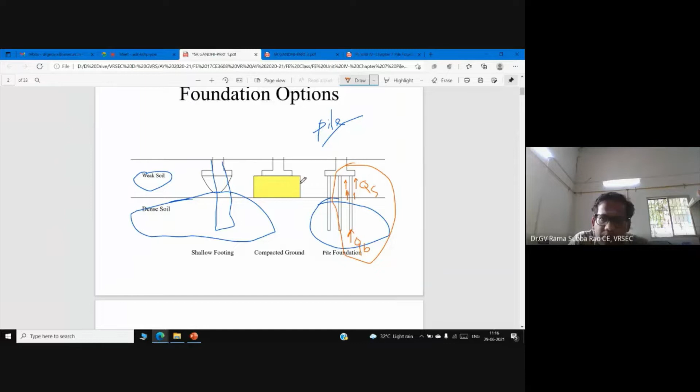I'm speaking about a single pile. Gradually, we'll discuss groups of piles. If you are going for ground improvement, you can still go for shallow foundation. But if you are not ready to go for ground improvement, then the first option is pile foundation.

So the beauty of pile is, it's not only having end bearing. In the case of shallow foundations, they have end bearing. Whatever equation you are trying to use, it is end bearing - what we calculated, c Nc, q Nq, 0.5 gamma B N gamma - in fact, it is end bearing. Whatever you are trying to show, it is end bearing.

But here, in addition to end bearing, it has skin friction also along the length of the pile. It has a tremendous skin friction. That is what we would like to tell you.

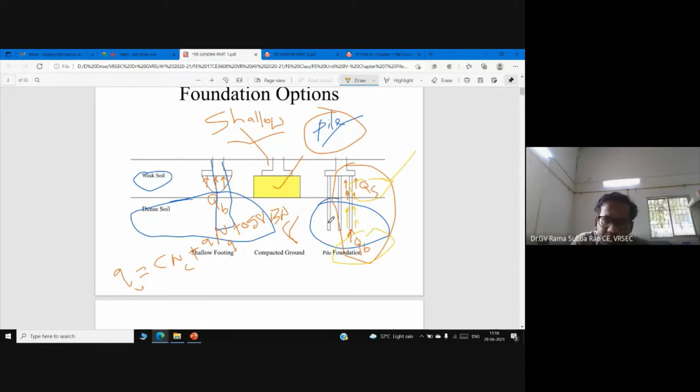So now you see, this is the advantage of pile foundation. Pile can transfer the load to deeper layers.

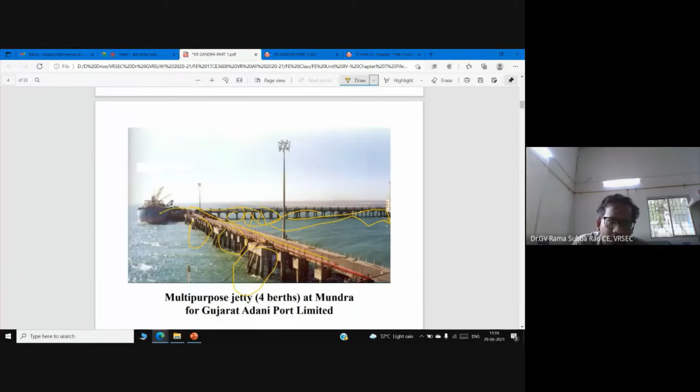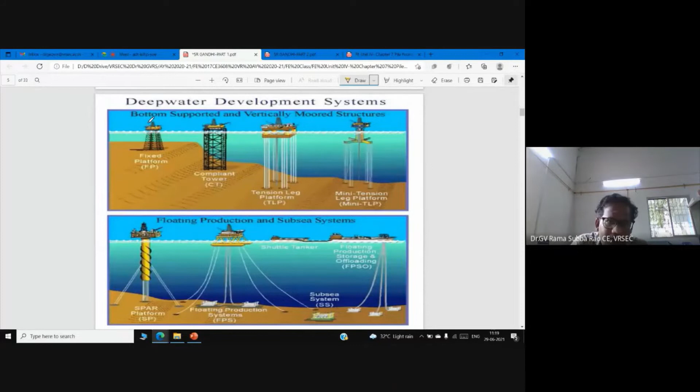So this is a wonderful picture. It shows a series of piles supporting this jetty, in order to facilitate cargo transport - this is what's happening in the port. These are typical offshore structures. Oil exploration is happening here. You might have observed this in the news - this is a fixed platform for oil exploration, many times used by ONGC, Oil and Natural Gas Corporation.

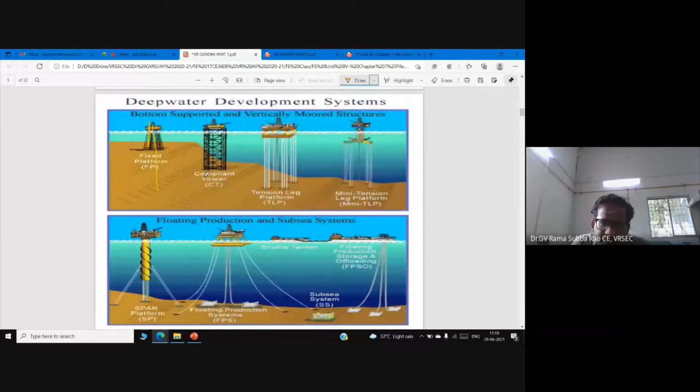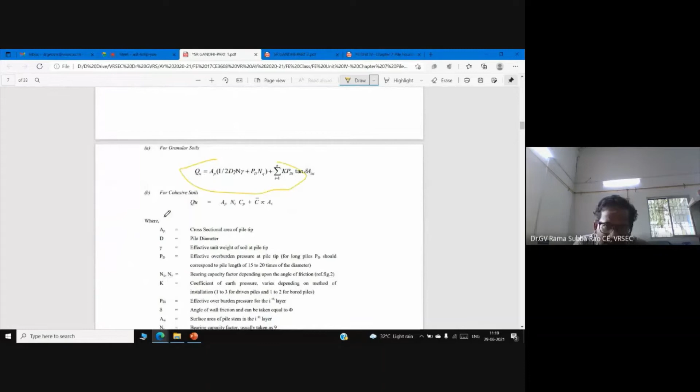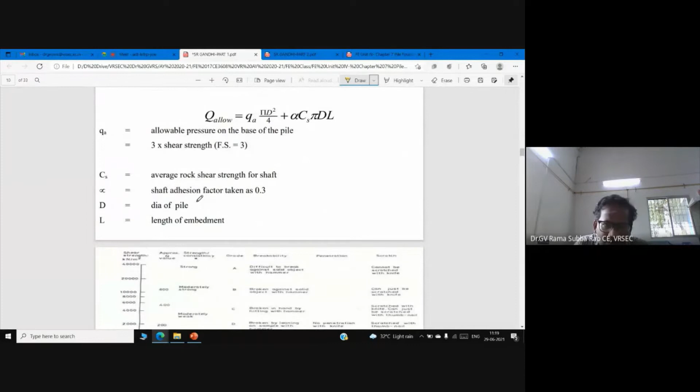So this is the code of practice we are using, IS 2911. Anyhow, we will discuss these formulas - don't worry, this is what we used to discuss in classrooms. We are very good at dealing with theoretical aspects, but now our interest is to understand the practical aspect before starting the theoretical aspect.

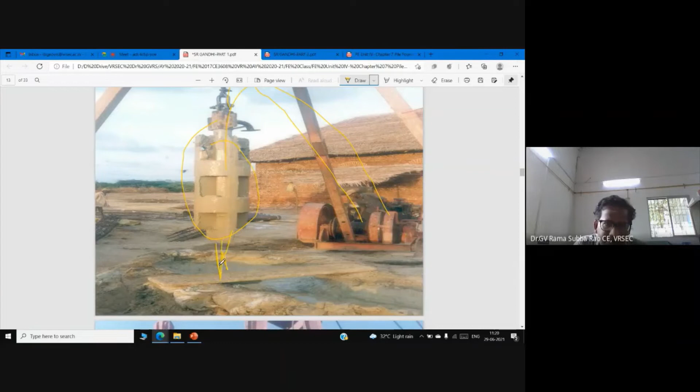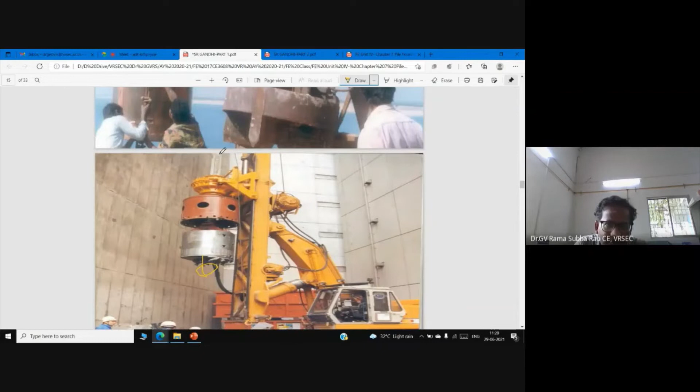Now you see this chisel, used for making boreholes, operated with a winch. This steel rope is connected to the winch. Now you can see this chisel in action - this is the hydraulic rig actually. One can guess the length of the pile we are expecting from the length of this drilling rod.

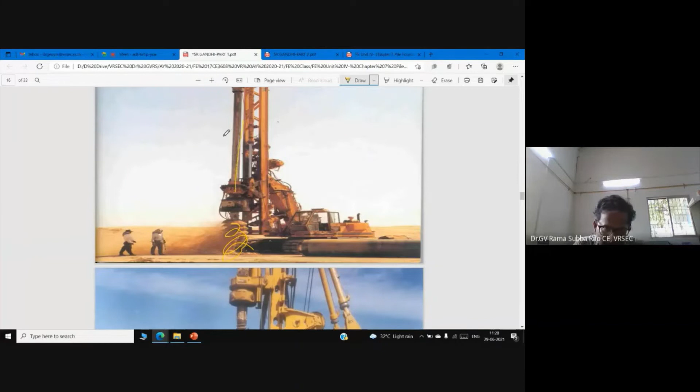Now you might notice this equipment nowadays even in urban areas. You can see this helical auger - the rig has a rotary action so we can make the borehole. You can see these people are very busy making boreholes.

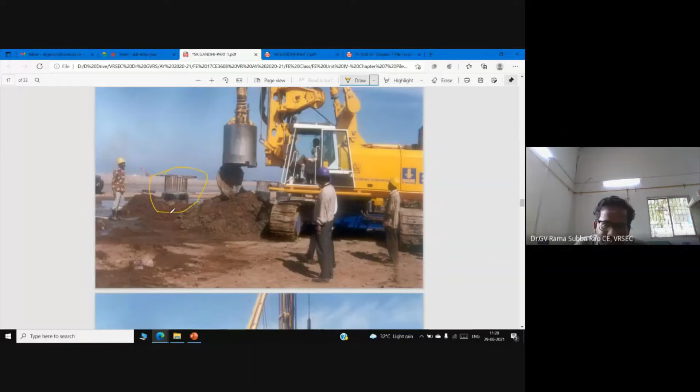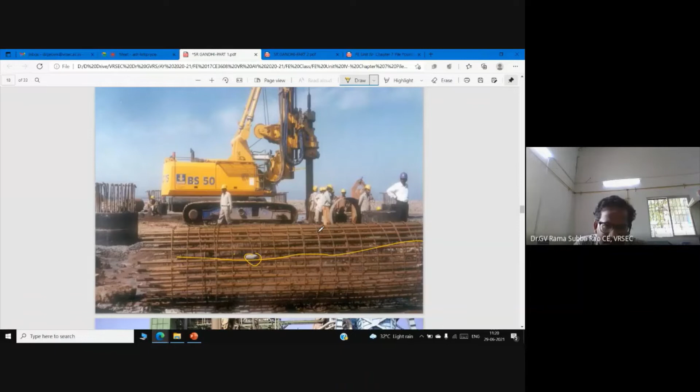This is the constructed pile. This is the reinforcement actually. These are the cover blocks - usually for large diameter piles, we use 75 mm, 3-inch cover blocks. Yes, this may look like an industrial structure.

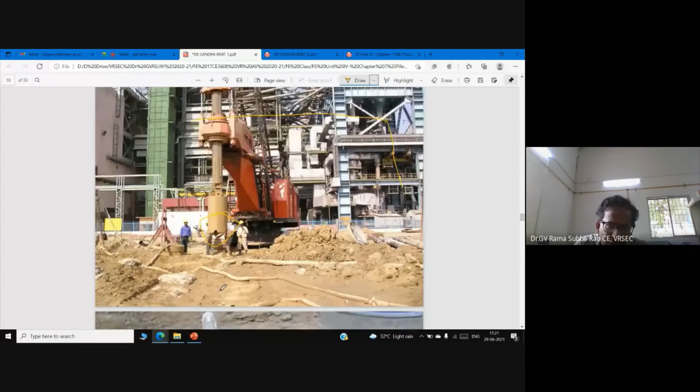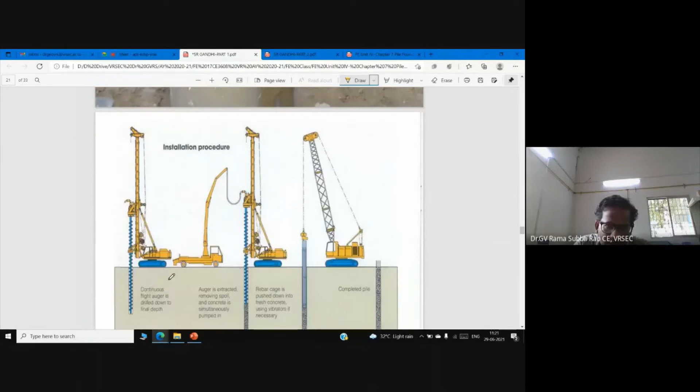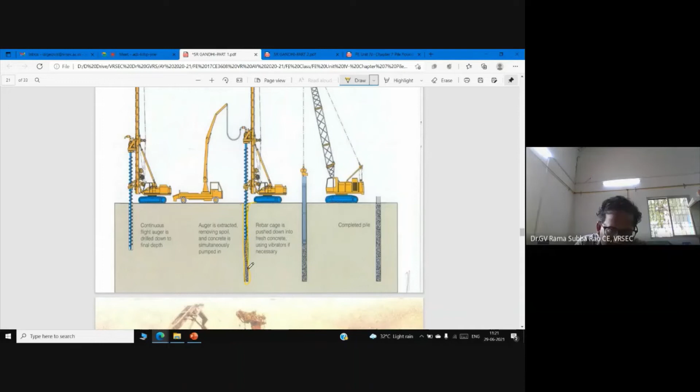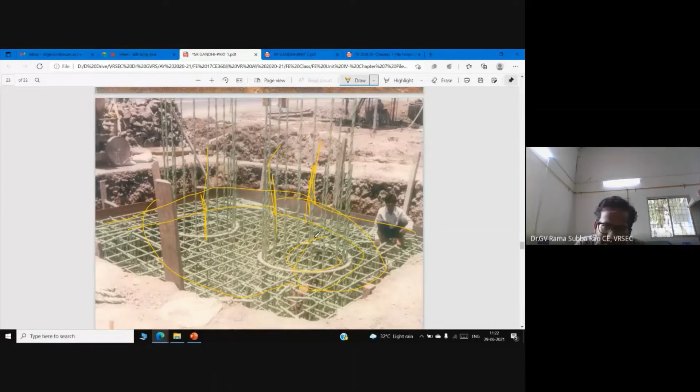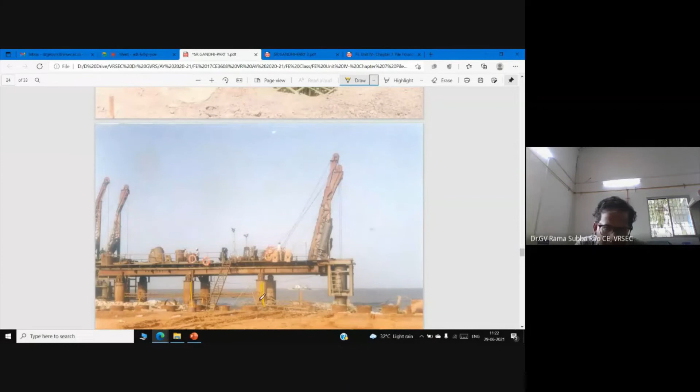These reinforcing bars are coated with anti-corrosive elements. I think these are all driven piles, maybe steel pipes - now the piling is in progress. This is a typical pile arrangement for supporting an excavation, which is quite common.

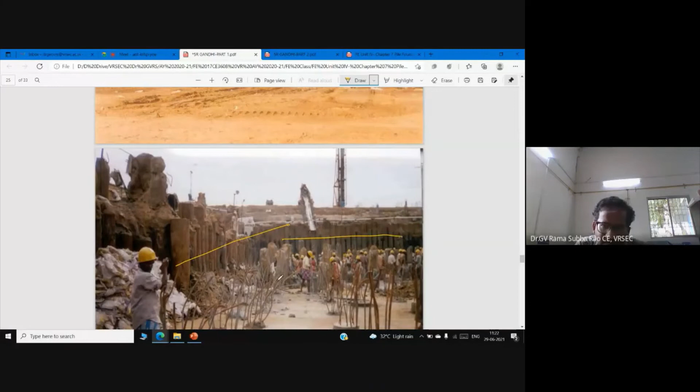And this, as I told you, is a precast pile.

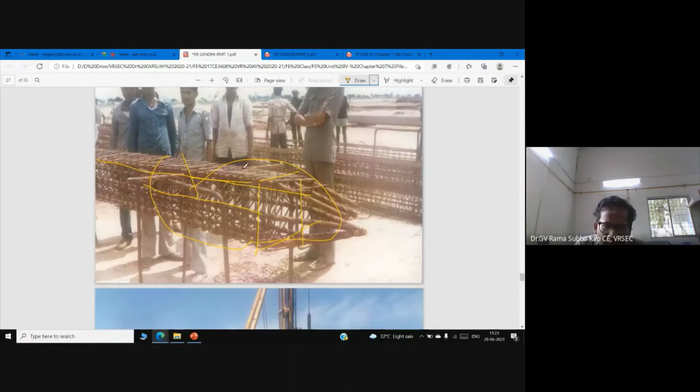Whenever you see people finding it difficult, this is the driven pile. Now it is lifted by crane. Once it is in position, they apply the hammer energy - the pile is driven into the ground and ultimately installed.

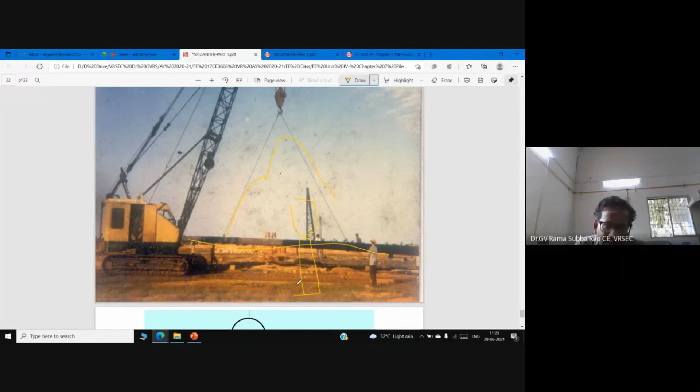Yes. Make the hole, keep the reinforcement cage, and pour the concrete by using tremie concrete. Then pour the concrete - the concrete will reach every corner of the borewell.

So this is the conventional cast-in-situ pile. Cast in situ - the name itself says it, we are casting the pile in situ. Bored cast in situ, strictly speaking.

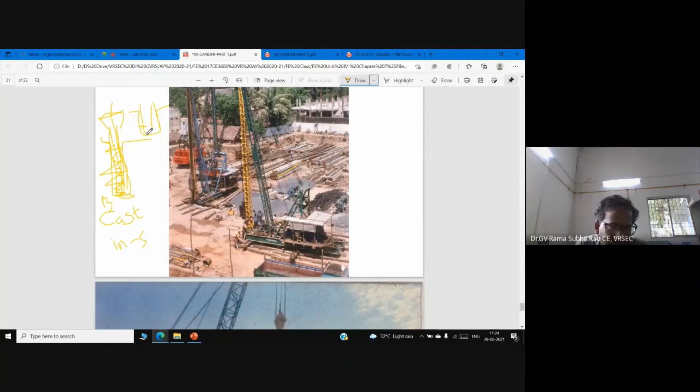I just made a hole - boring is done. After boring, we inserted the reinforcement cage, then started pouring the concrete using tremie. Finally, the pile is constructed - this is what I say, bored cast-in-situ pile.

Or else we have a precast pile - the pile is cast in the casting yard or at the site itself. Sometimes people make the pile. We have pre-stressed piles also - if you want a more stiffer pile, we have pre-stressed concrete.

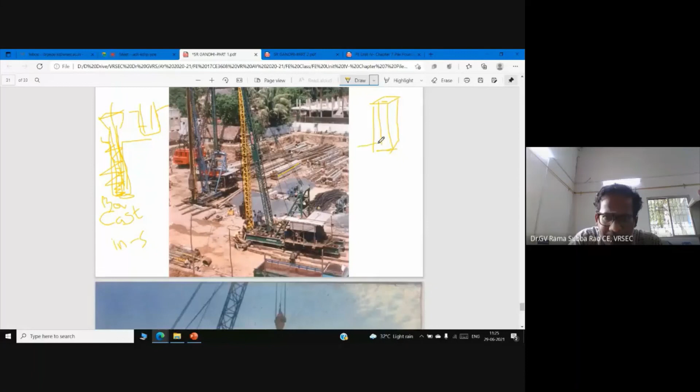So cast the pile, and now what we have to do is come to the field. Then you drive the pile with the...